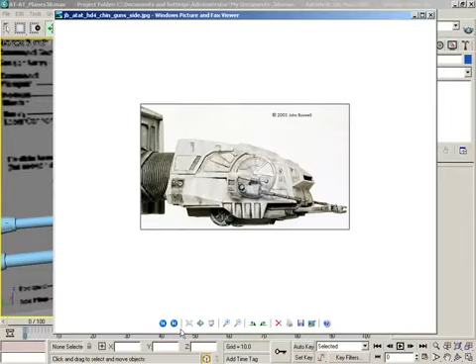So I'm just going to get something close, you'll be able to tell what it is, and we'll move on. Even that looks really different than other models I've seen. So if you want to build your own version, you have my blessing and encouragement. I'm going to build something fairly close to this - I like the long gun stick sticking out there, I think that looks really neat.

To help me do this, I'm actually going to build it over on the opposite side. It's just kind of a matter of preference.

Well, I will from my perspective work anyway. For starters, let me begin not by making a user view, because we don't want to make a user view. Did you see what I just did? I actually undid my change to the view - that was terrible, I don't want to do that. There we go, sorry, I got a little carried away.

Now I'm going to draw just a box over here, some sort of rectangular thing, just to get me started. Proportion, placement, all that is going to be based off what I can glean from this image. I'm not even going to be as detailed as this, but I'll get something close enough where you'll be able to tell what's going on.

So I'm going to start up here at the very top with this little smaller cannon. Oh, that's great, so let's slide you up to about here. Now changing around the overall size of this guy, let's pull back on the height just a little bit.

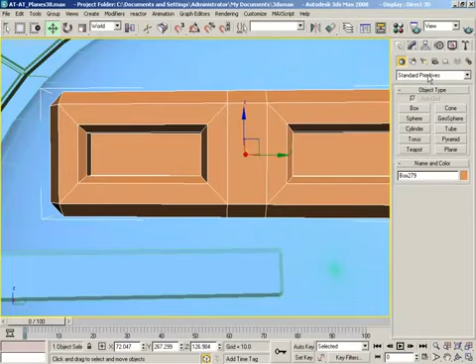Now back over here, let's create a box with auto grid on, and we'll just fill it in here. And let's go ahead and kill off that extra length segment because we just don't need it. Let's switch over to an editable poly. We'll grab this guy and convert that to edges and get you and you and you and you, do a quick chamfer.

And click OK. Alright, so what we've just done is we've built this kind of area, and it looks like we could make it a little longer. I'm leaving myself open to that sort of thing just by grabbing vertices and moving them around. So maybe we just grab this and slide it back a little ways. In the end, the whole thing may need to scale down when we're all done, but that's fine.

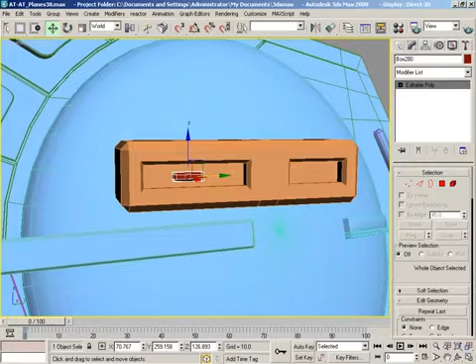Adjusting shapes is very easy. Now we've got a couple of different layers of detail, and like I said, I want to get something kind of close. Let's create this little triangular piece up here near the front, because that does look really cool.

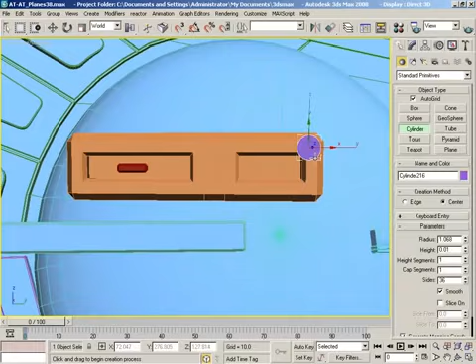The way I'm going to do that is start off by making a cylinder with auto grid on. Let's make it right here, put a little height on it. Now we're going to take our sides and really crush that down. In fact, 3 is pretty much what I was going for. Slide this over, and we need to pick up the height on it, so larger height and bigger radius.

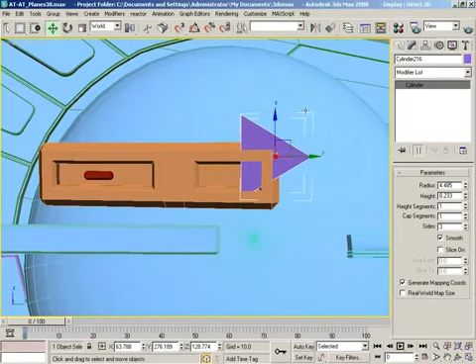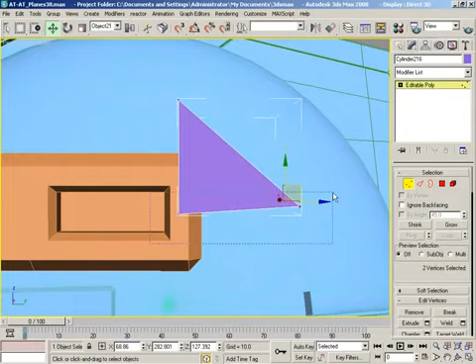Let's switch it over to an editable poly. We'll center this up, frame up on it. Let's switch over to vertices. We can take this vertex, slide it up, take this vertex, kick it down about like so. Actually this whole thing probably needs to butt up toward the end of this. So boom, now is that flat, I ask you? Yeah, it is. So boom, boom, boom. No problem.

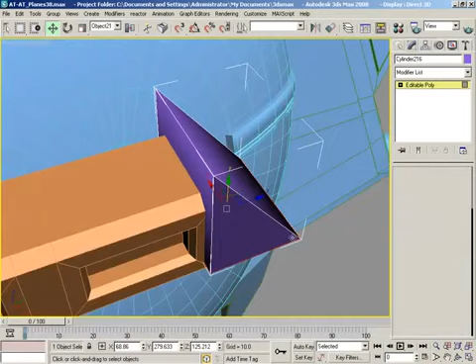Let's grab this face and run it in Y to flatten it out. That looks nice. Now we're going to switch over to edges. Give me this one edge here. Let's ring that, let's chamfer.

And we can add a segment or two to help us out a little bit. Actually, let's do this separately, so we want to deselect this guy. Actually, cancel out entirely, just give me these two, and then chamfer.

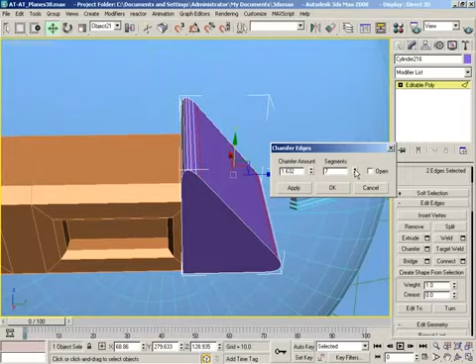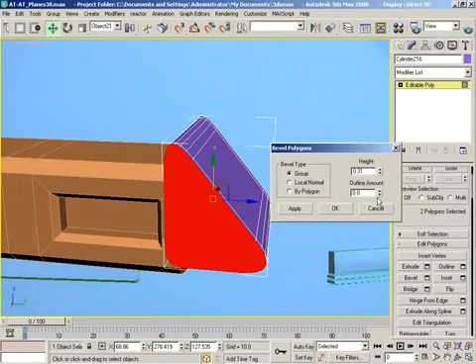And then let's click OK and do this guy separately, so we can pull that down. Click OK. Let's grab these two faces here, and let's just do a quick bevel, like so.

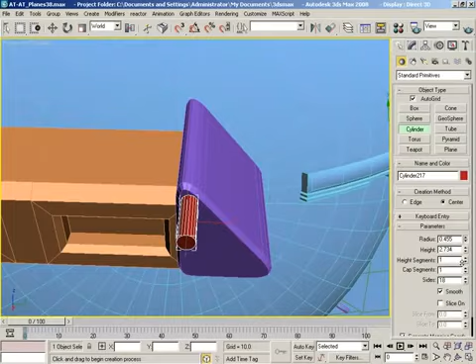Now, to help show off certain things and hide others, let's grab a cylinder, and we'll put that in, give it a little bit of height. We'll take the sides back up, say to around 18. Let's play with the radius and the location. In fact, I'm also going to play with the height, so I'm going to take the whole thing and we'll just slide it all the way through. We'll end up getting some free detail on the other side, really.

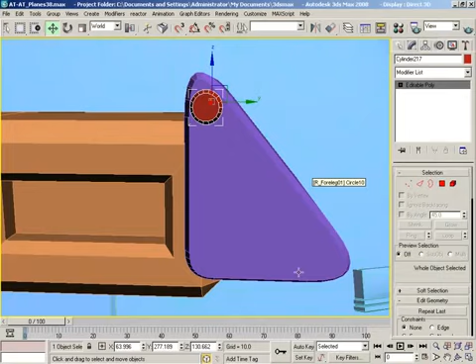Convert, polygon, polygon, and bevel. Click OK, get out of there, and let's see here. We can make a copy here, and make a copy here.

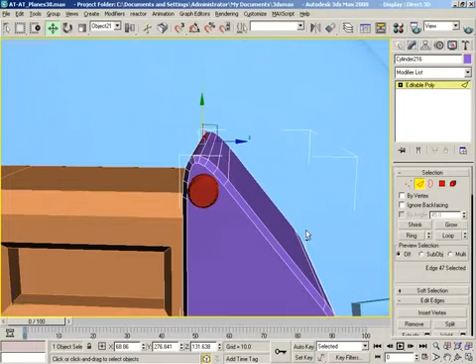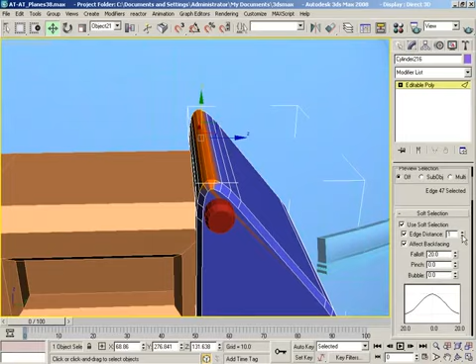Now let me do something real quick. Let's grab this guy. Now if we do a soft selection, let's do shaded face toggle to kind of help me out a little bit, and maybe edge distance will be a little more cleaner for what I've got in mind. Frame up on this guy.

Not so much. Let me try vertices and see if the vertices will give me what I'm actually going after here. And I'll just convert this over. So Ctrl loop this? And then switch that over to vertices, and that gives me those, so we can kind of see what's going on there.

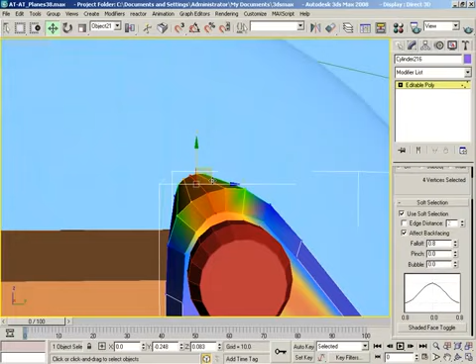Now, fall off, pull that back a ways. That's pretty close. All I wanted to do is round that out a little more. It's not precise by any means, but it's better than it was. So that just straightens that up a little bit.

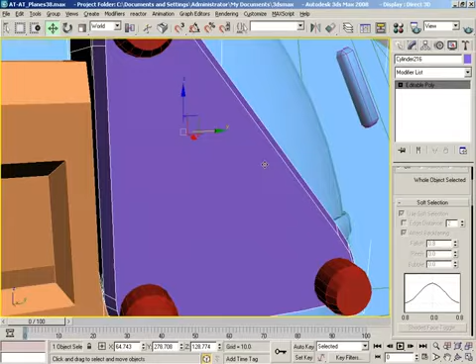Let's come back over here. Actually, you know what I'm going to do here? Grab you, slide you down. Let's just do that with everybody. Just going to make the radii a little bigger.

Okay, so now that's coming along. Now if we do this kind of plate thing underneath, and I'm going to really simplify this down a bit, like so, let's build a box, and then for convenience more than anything else, I'm just going to build it with auto grid on right here. Because I don't really want it to keep those dimensions at all, but doing that puts it right where I want to play with it, so...

We'll do this. Now let's adjust the width. Let's kind of center it up on the whole contraption. And I'll also change the height a little.

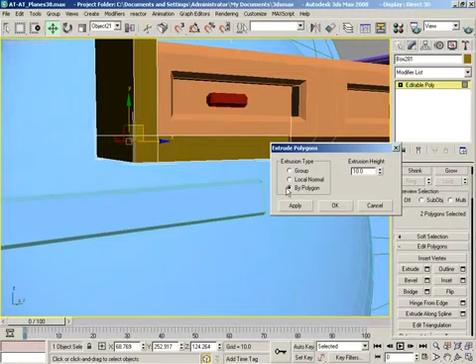Now let's convert this. I want to grab polys here and here, and I want to extrude these. We don't need soft selection anymore, so that can go away. So I'll extrude by polygon this time, and by just a little bit. Click OK.

Let's grab, let's see here, what I need to do is get a chamfer going. So let's get you, and we'll do a ring. We don't need this, actually faster to get this. And you, and you, and you. Convert that to edges, lose that, lose that. Add you, add you, add you, add you, and you, and then drop these guys. Now let's do a chamfer.

Okay, get out of editable poly mode, give me one of these guys. Let's shift drag a copy back here, click OK, scale it down to kind of fit in there.

Now I want another copy of this to go up here. Okay, rotate. Oh, I need rotate snaps on. Nice.

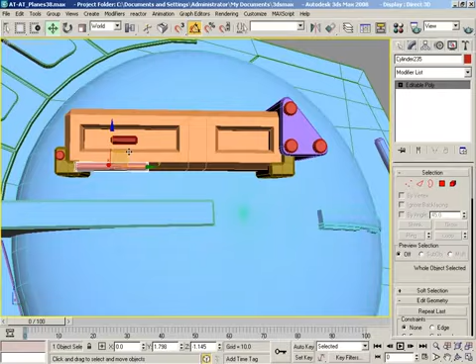Right, now this guy we're going to scale down, he doesn't need to be quite as wide as he is. And I'm going to shift drag a copy of it out, click OK, grab rotate, rotate it around 90 degrees, position it right here, snug it in a little bit, scale out. Boom, oh that was crazy.

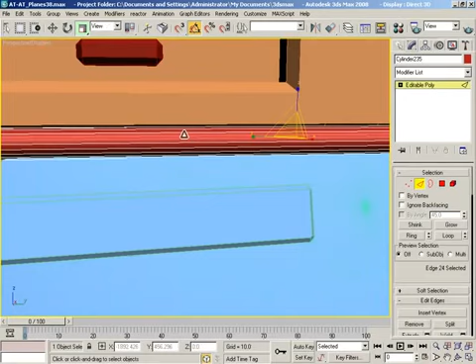Now let's quickly jump, grab an edge, we'll ring that, we'll connect it, just once is fine. Let's move the connection over here. Actually let's do this a couple of times, why not? So let's connect twice. Click OK, that's fine where it is.

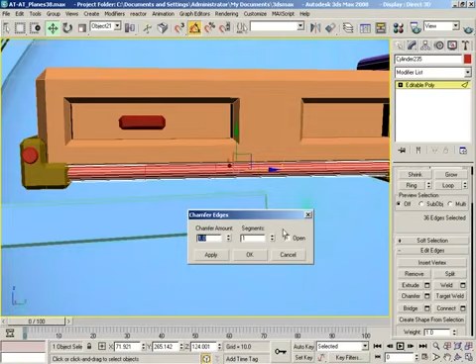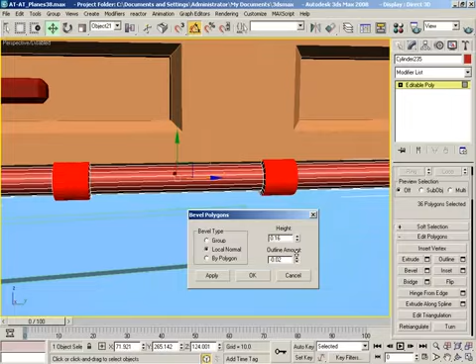Let's chamfer by nowhere near that much. Click OK, give me this and this, give me rings, convert those over to polygons, and let's just bevel those out by local normal. And there you go, so just a little bit of differentiation.

Okay, we're almost where I want to be. Let's make a box, I'm going to run it pretty much the whole length of this back here, give it a little bit of thickness, and go ahead and convert it. Polygon, you... actually no, not exactly.

Let's instead go to edges, get this guy, ring, connect, once is fine. Slide this back. Extrude, I'm just kind of racing through this one. Click OK, grab edges, let's slide this guy back a little bit.

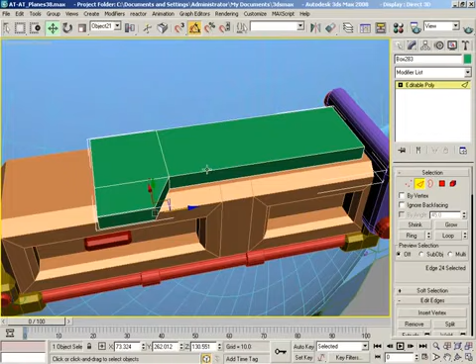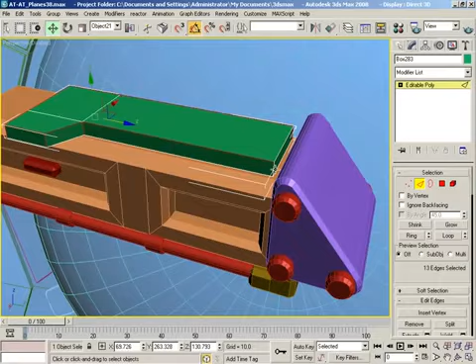And let's see here, if I loop... actually let's do this first. Ring this guy, so we don't need to... you know what, we don't need these either. We don't need those bottom edges at all. We don't need you. Alright, let's just try this.

So we chamfer just a little bit. Okay, we'll just slide that in, so penetrate that through like so, and let's see. Boom.

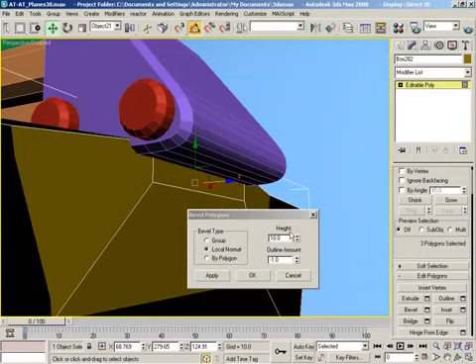And grab this little guy here, slide him up. And I'll extrude this again. Now let's see here, if I click OK to that, grab these guys, and we did a bevel by local normal with just a little bit of height and a little bit of inset, just for some variation.

Okay, cool, I'm all right with it so far. So now this just needs some sort of, well, whatever kind of gun that is, or launcher, or what have you.

So here's how I'm going to do that. Let's grab a cylinder, and we'll drop it in right here, and give it just a little bit of height. Doesn't need much, not for what I'm going to do anyway. Actually, well, yeah, let's not do negative height, I don't really feel like doing it that way.

But we can take that height and really just crank it like crazy. Slide this over here. Run that height the rest of the way back out of the object.

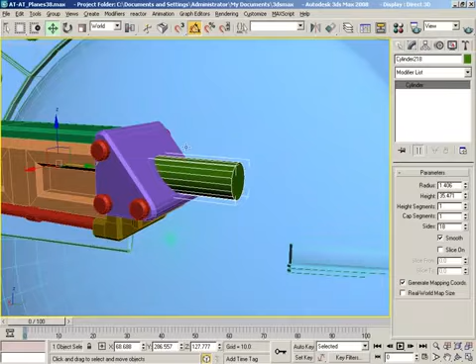Now if we switch over to this guy, let's grab edges. I really don't want soft selection on anymore, so that needs to go away. Grab this edge and close that. Let's ring this around, let's connect this with 2 connections, and then we're going to pinch it apart like so.

Now let's see if I can do what I think I can do here. I think I say that a lot when I'm on these videos. I probably do, but you know, that's alright. Ooh, that's a lot of chamfer. So let's see, just something kind of like this.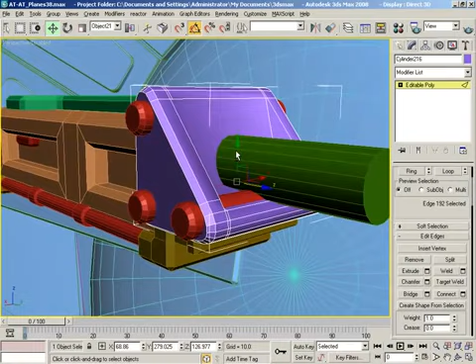Click OK, grab this guy, we're going to slide it back. To about here. And that'll be fine. Now let's grab this polygon by itself.

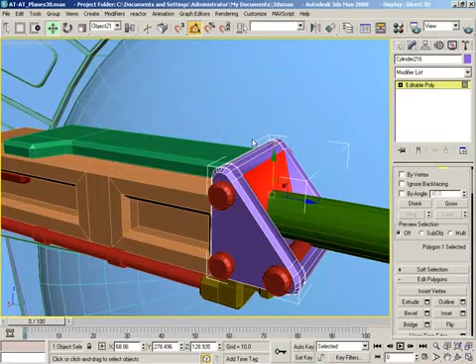We'll do an inset. I'm going to change the shape of that inset just a little bit. Actually, you know what, let's just leave it alone, just as it is. Yeah, I'm fine with it.

But we do need to fix our smoothing groups because they're a little crazy right now. 45 might give me what I want. It probably will.

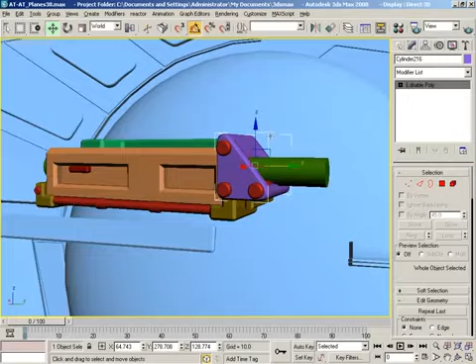Yeah, that'll be fine. Okay, so now back to this guy, this needs to be an editable poly. We need to grab this, frame up on it. Ooh, not with the front view. That's actually hitting the F key.

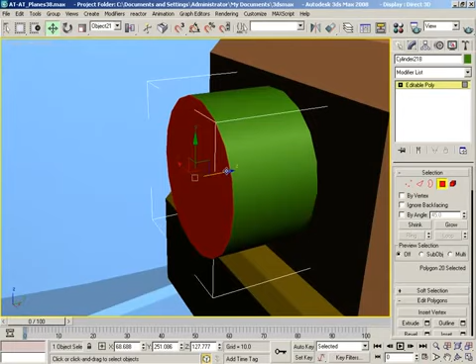That's another popular 3D package. We need to hit Z if we want to frame up on something. So let's slide this in like so, and then we're going to extrude it out a little bit.

Actually, let's do a bevel. Bevel! Bevel out, and then out some more, and then we'll do a straight up extrusion. So I'll just do apply with no outline amount. Pull that back, and then apply, and then pull the height back.

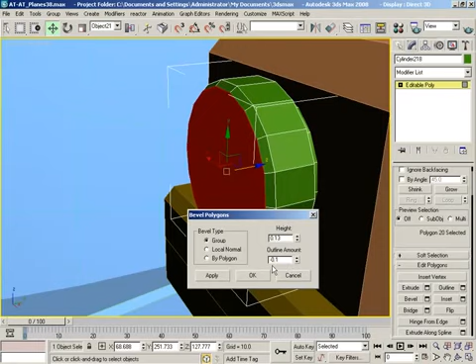Let's press F4 so I can kind of see what these edges are doing. Pull that down, apply, no height, just negative outline, so it's like an inset. Apply, add height, I like the little bit of taper, but that's a little much. Apply, boom, boom, and then just put a little bit of rounding at the back.

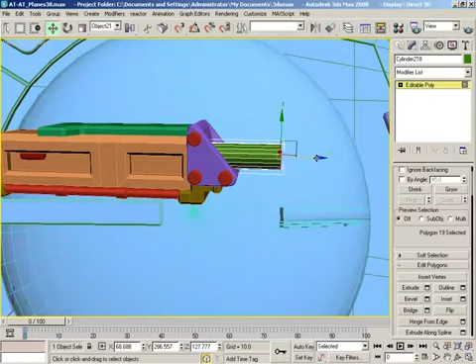Now, so that is working. Let's see. That's all well and good, but I'm going to slide this back in here and let that sink into the shape. So that's just going to be the back now.

I'm going to shift-drag a copy of this face out here, clone it off to an object, and use this to kind of recenter where this gun comes out. So let's get out of editable poly mode, grab just this little disc we've made, and pop this back in here.

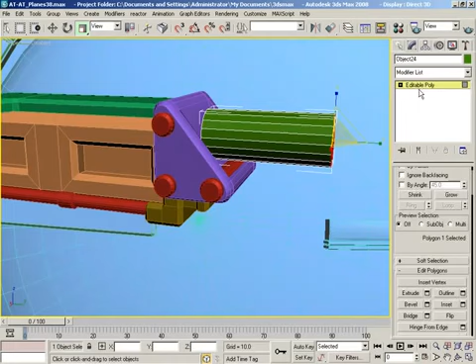Scale it up so now I can make a larger cannon shape. Do an extrusion, say to about there, and click OK. Now let's take the whole thing and sink it into the shape like so.

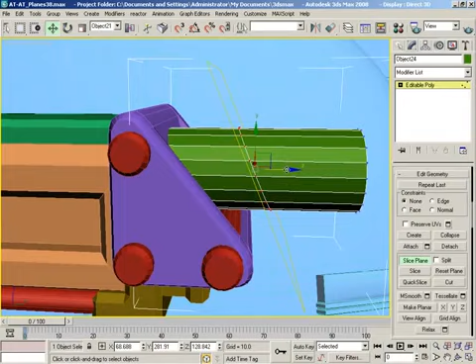Now, some vanity stuff. What do you think? Let's grab vertices, and grab the old slice plane. Let's rotate this back and slide it to about here. We could make it a little more parallel with that triangle if we felt inclined to. Slice, now let's grab edges, ring, convert to polygons, and do a little bit of a bevel by local normal.

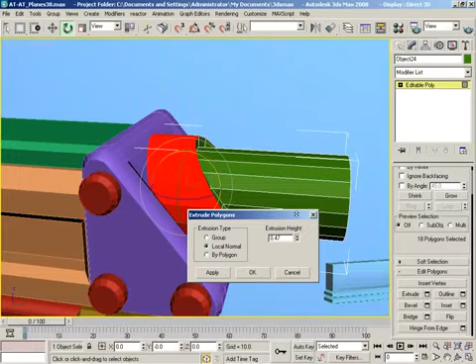Let me cancel that. Yeah, let's do it this way. Let's just do an extrusion by local normal. That's really crazy what that just was. Let's run that, that'll be okay.

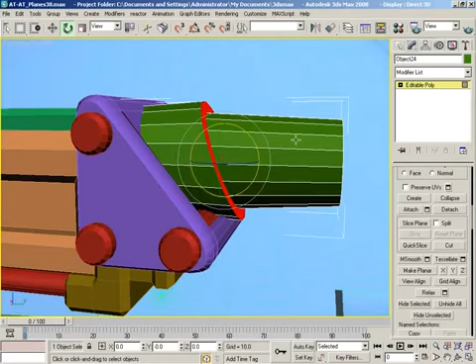Now I want to try something. Theoretically this should work. If it doesn't, I'm not really out anything, nothing that's going to hurt my feelings. Let's ring, convert this over, and try making that nice and planar. Okay, I got us started. If I take all these and scale them down, we should get something pretty close to still being perfectly cylindrical, and it seems to be. So that's good.

Now if I go back to edges and connect all these, we can't really pinch, but I should be able to slide. So let's slide that in, click OK, grab this, ring it. This is probably finer of a detail than I need, it's just something I want to do.

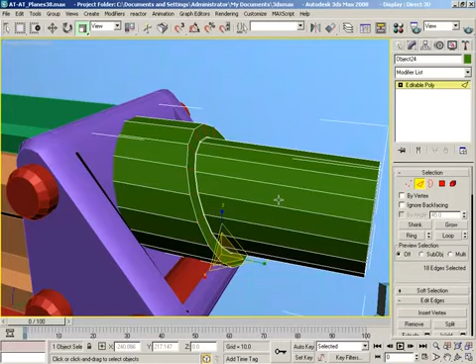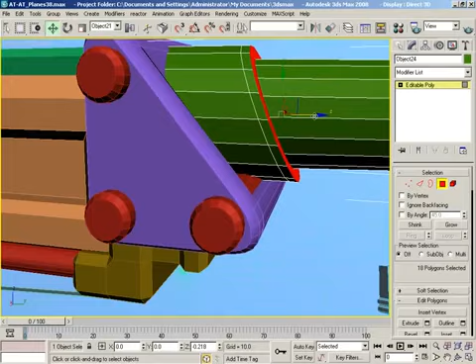Convert this over, then extrude as a group. That's just the viewport being silly. We'll just go with that, but then I'm going to slide all of this stuff down, like so. We don't really need to go very far. Actually, let me not do what I was just thinking I was going to do there.

Let's just bevel this, with just a little bit of height and a little bit of outline. There we go. Now let's come back out here to our picture.

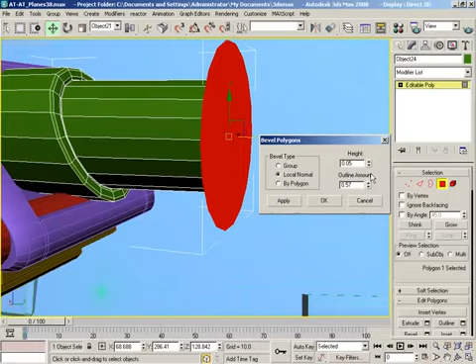We just have this kind of extended open end on this, so we'll grab this polygon out here at the end, like so. Let's do a bevel, of course this will have just a tiny amount of positive height and a larger outline, then apply. This time we won't worry about outline, we'll just add to the height.

Now we'll apply again, this time no height, make an offset, apply again. This time no outline, we'll just go inside a bit, and that'll probably be good.

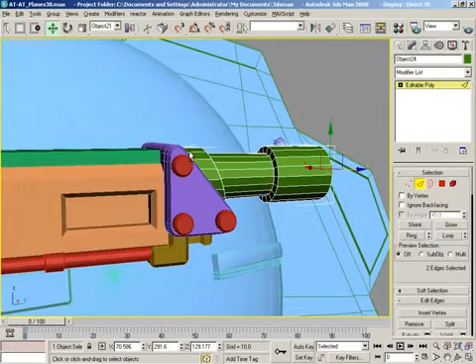Now let's click OK, jump over to edges, we want you... and you. Let's do a chamfer. Actually, let's do a loop first, and then do a chamfer.

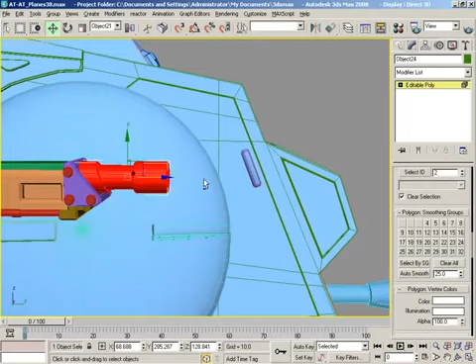Okay, let's grab the element, and we'll do about a 25-degree auto smooth. Alright.

So there's that upper piece. I mean, if you wanted to continue decorating it, add little tiny greebles all over it, you could, there's no reason why you shouldn't. But I'm not gonna. Now what I am gonna do is build the little mount piece that clicks this up, because this is like a smaller gun on top of a bigger gun.

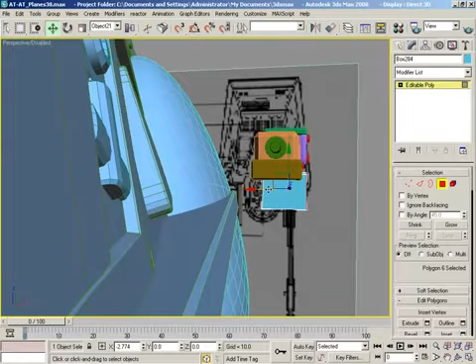So let's build that. I'm gonna start this off with another box that is auto-gridded into place for us. To make my life easy right off the bat, I'm just going to convert this over to an editable poly. I'm going to grab this polygon, slide this back a little bit, grab this polygon, slide it out. This one, slide it out as well.

I'm going to kind of simplify what we see here by just a little bit. Yeah, definitely. Now we don't really know what's going on the back of this, so I'm totally going to make it up. In fact, we could go ahead and get that out of the way.

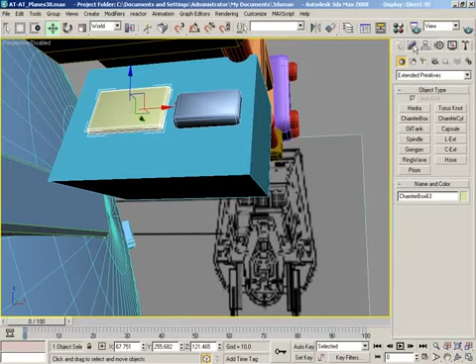If I grab extended primitives, let's just do chamfer boxes because they're fast and fun, right? So boom, and then out, and then pull in a little bit, and then boom, out, maybe a little thicker, and in a little bit. And I really don't want that many chamfer segments or fillet segments, I really don't. So let's grab this and set its fillet segments down as well.

Let's go to local mode and push both of these down into the shape a little. We'll grab this guy and then just shift-drag him down so there's another one.

Now let's go over to standard primitives. We could probably cheat for what I'm thinking we're going to do here and use a torus. Let's just see if it works. Ooh, that was crazy. So there's a torus, and that's fine.

Now let's play with its settings. We'll boost the radius, increase radius 2. Now sides and segments, let's take our sides and pull that down to 4. And then we'll twist that by 45 degrees, not 15, but 45. And that almost worked, didn't it?

Oh, I see what that does, that's twisting the whole thing. So there is no really nice way, let's roll this thing around. Oh, that's okay. I was actually thinking like a spline, if you're familiar with what I'm talking about, and if you're not, that's cool too, because that looks pretty good. We could probably just go with that. And let's make another copy of it back here. And there you go, cool.

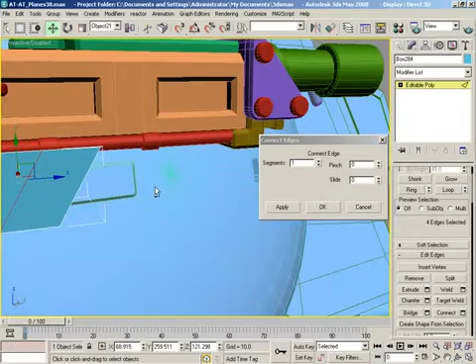So the way I'm going to do this is, well, let's start off by ringing these guys. Let's make a connection, and we'll do 2. Okay, I see what I want to do here. So we'll grab these two guys, click OK, grab you, ring again, make a new series of connections, say right about there, I suppose.

Now we're going to take these two and we're going to chamfer them like so. Now let's grab faces. So I want you - oh, didn't mean to do that. That's right, let's grab these guys, make sure we get that chamfer in, and make sure we click OK before we get all carried away and do something else.

Okay, now let's grab faces and get you. Let's extrude these out, not that far. Click OK. Let's go to edges, and I want this edge, this edge, this edge, and this edge. I want to turn on edge constraints, and then we're just going to slide these down, and then we get that kind of change in direction, which is pretty nifty.

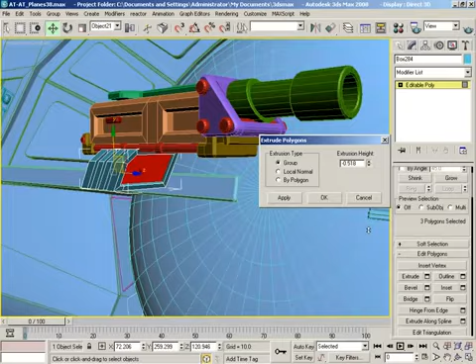Now a couple things, let's go over here, grab these, and let's just do it over here too, we'll do it all at once. And we'll do an inset, pull that in. Okay, let's do an extrusion that goes inward. Oh, terrible, terrible, terrible. Okay, that should be everybody.

And then, oh, we just select from backface. It's like I think that 'on' should be the default setting for that. Okay, so inset. But then, of course, nobody asked me. All right, and that looks good, so we'll apply that, and let's say cancel, so we got one application there.

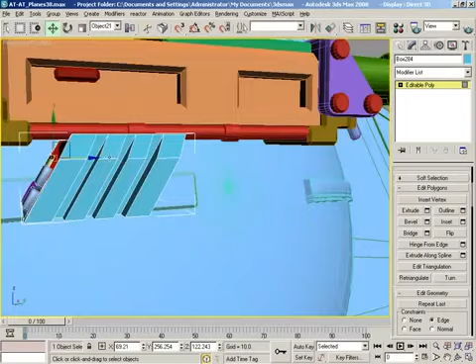Now I'm going to do a tiny little extrusion, just a little bit of a negative extrusion, just a little bit, like so. Click OK. Now let's get these faces by themselves, and we'll slide them forward a bit. Turn off edge constraint.

Okay, now we'll grab these guys all by themselves, we'll slide them backward a little bit. Now let's get out of editable poly mode. Let's grab these little random greeble objects we've made here.

And then let's do this. Let me go to world, and let's go by object. Let's just shift drag these because they're double-sided shapes. They should just go fine over here as well, since I don't figure anybody can look at one side and the other at the same time. We'll just leave that just like that.

Okay, now that whole thing is probably a little bit undersized, I'm thinking, or maybe this is too big. Let's see if I pay attention. Yeah, I think my little cannon up here is actually a little bit oversized. Not that that's a big deal, we could just say well this one's bigger, and they need it for extra awesome rebel destruction. But what we're going to do, let's see here.

If I could just group and scale the whole thing down as one, let's just do that. So group, small cannon, and click OK. Now we can just take this whole thing and scale it down, down, down, down, down, down. And just fit it in right there.